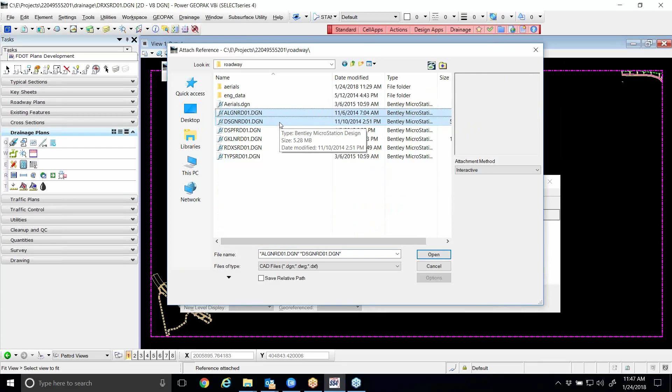So what we were trying to do is reference in some files from Roadway. So I'm going to go up to my Roadway folder. I'm going to use Control, and I'm going to pick the DSGN RD01 and the alignment file. And I'll open those. For your alignment file, you don't want to reference the default model. You want to reference the ALGN RD_50. That has the 50 scale tick marks and station labels in it.

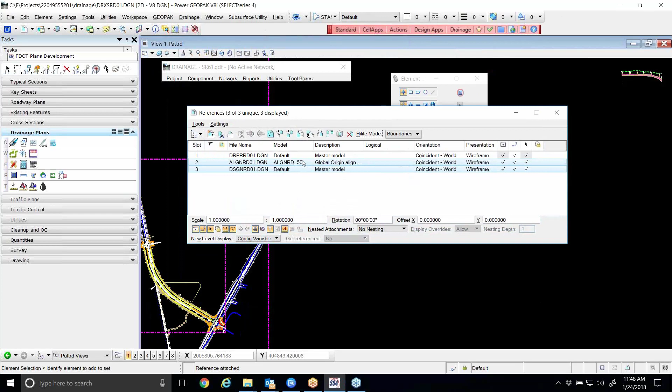Where do you do that? Okay, so when you reference in these files, at the top of the dialog, when you reference in the alignment file, it will default to the default model. You want to pick the ALGN RD50. If you've already referenced it in and you accidentally got the default model referenced, that's okay. You can go to your references dialog, right-click on the ALGN RD01 and go to settings, and you can swap out what model is referenced without having to go through that whole process again.

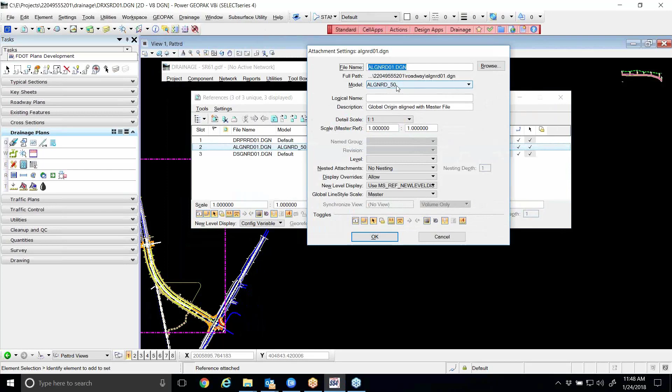But the other two can be default? Yeah, the other two are just default. It's probably the only levels in there. We don't need the survey file. We don't need the GK line file. Really, probably all we need is our DRP-RRD, because we're about to hopefully create some pattern lines that cut through those structures, and we want to put those structures on cross sections. So this is a potential here on step 8, 14.6, where we might run into an issue. We're going to find out.

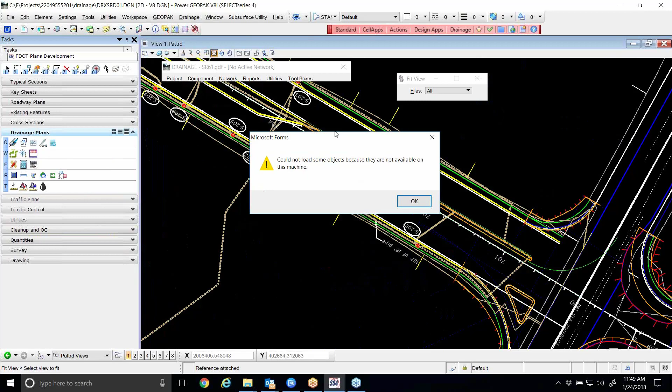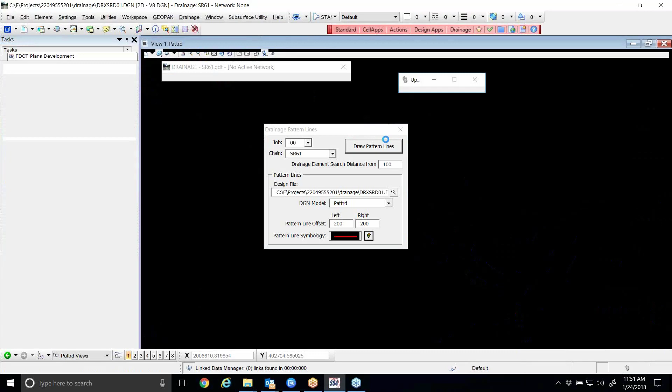Yeah, never mind. Oh, hold on. Go ahead and get rid of that dialog box there. The second scale. All right, I got mine to work. We'll get everyone's working. Let's say you ran into this problem and you had to absolutely get this done. You could draw the pattern lines manually.

Yeah, if I use the old tool, that should do that. It'll allow you to have multiple. Yeah, I don't know if it's drawing them from. It should go in station order. Left to right. Yeah, it lets you pick a chain. We don't care about the profile. Left and right offset, you can pick the symbology. So you could use, if you had to, the older GEOPAK tool for drawing pattern lines. You have to draw it exactly at the station, the center of the structures.

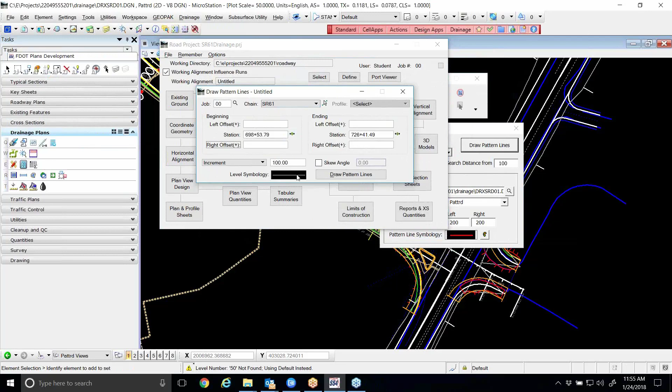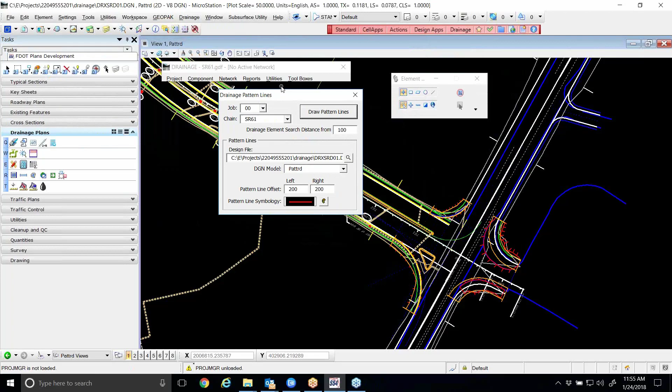You could even draw those lines manually, but as James is saying, they have to be drawn oriented left to right and lower station to higher station. Yeah, they have to be a line, not a line string. There can't be any PIs in it. It's just endpoints. All right, so I'm reopening the DRXSRD01 file. Don't really need to reopen the drainage project for this tool to work.

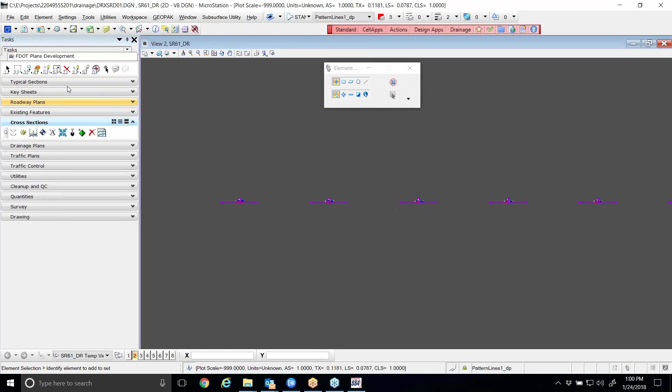And then we'll start here back in our FDOT plans development task, but we're going to be in, not the drainage plans, but the cross sections portion. For your DGN model, you want to be in the PATTRD model. There are a couple of issues that we think we found here on the pattern lines, and your best option here is to delete some of these pattern lines.

So as you go into that PATTRD model, there's going to be a pattern line almost right across from S203. You're going to see a manhole, and you're going to have a pattern line that goes right through that manhole. That manhole doesn't connect to anything else. We think that might be causing some problem with the next few steps that we're going to do. So we really don't even want a cross section there. And as long as the pattern line isn't there, a cross section's not going to get created.

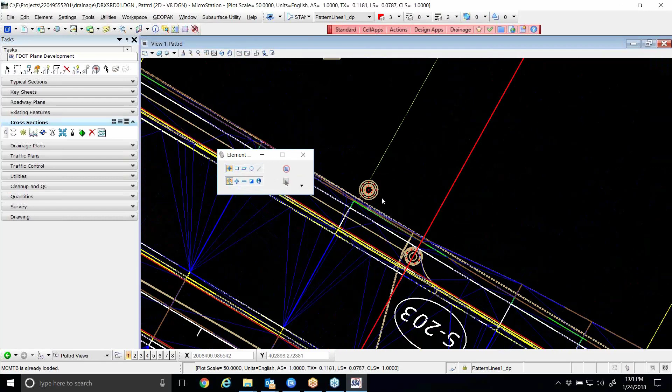So you're going to find one pattern line that goes right through this manhole at roughly station 70419, and you're going to delete that pattern line. So there's a red line that's going to cut right through that manhole. Just delete the red line. And then you're also going to see a DBI. There's going to be a pattern line going through that. That DBI is also not connected to anything else. Delete that pattern line.

And then we're not sure on this next one, but you're going to see a pattern line that goes right through S205. And the only difference, we ended up with it stopping and not processing at that particular station.

And the only thing we noticed that was different is that pattern line didn't have a corresponding structure over on the other side of the road. That may not be the issue, but we don't know because it stopped processing there. But there's another one here at 209 that it may not work on.

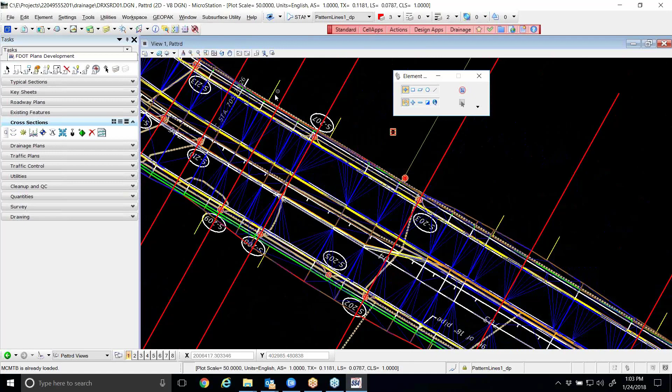So I'm going to leave that one in there, and we'll be able to process and create our cross sections, and we'll make sure that we're at least able to get a couple of cross sections to have the drainage structures on them. We probably will not be able to debug and get them all working. I've been able to get 3 to work so far. And I'll walk you through all those steps when we get there.

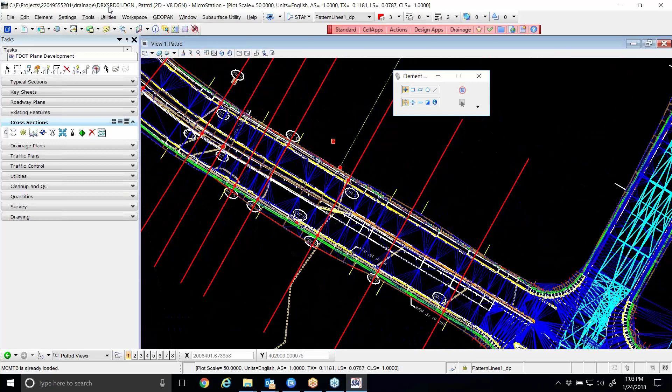So you should have deleted 3 red pattern lines. I'm in the DRXSRD01, but I'm in the model, the PATTRD model. Yeah, delete the one at S205 and delete the 2 that go through these structures that don't have anything connecting them. That may or may not be the issue.

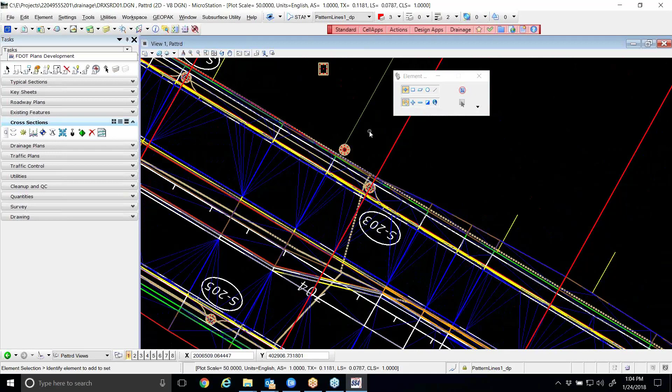We're going to get it to run for a couple of stations and call it good. We're not going to go and fix them all. Mainly what we're trying to teach is the process. We're not all trying to do 10 copies of this project.

But definitely in the real world, if you have a structure that nothing is going to, don't put a pattern line there. And there may be an issue with the criteria file that doesn't like it when there's just one structure that the pattern line is going through. Don't know, not really sure on that.

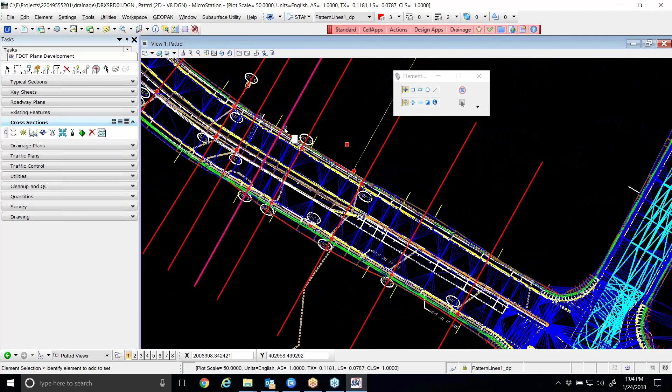So you'll have these pattern lines, and I would still make sure to go up to your utilities menu and pick data cleanup. Let's make sure there's not a pattern line sitting right on top of another pattern line or close enough that it treats it as a single pattern line. So I've deleted 3 pattern lines, just regular MicroStation delete tools.

And now I'm sitting inside of utilities, data cleanup, and I'm going to set my duplicates to be selected. I'm going to hit apply. You just want to make sure that there are no duplicates in this file. I think you'll find a couple, maybe 4.

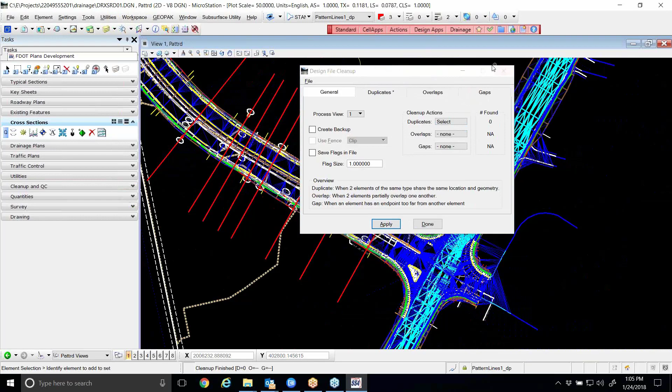So you're under Design File Cleanup. I have my duplicates set to select. I'm hitting Apply. Make sure that number that comes up is 0. If it's not 0, items will be selected automatically. Hit your Delete key. Hit Apply again, and then it should show 0 duplicates. And if you don't find any duplicates, that's great.

All right, so now what you'll do is you'll right-click and hold down your right mouse button, and you're going to pick Select All on Level by Element. And you're going to click on one of the red lines. One red line that you click on will highlight briefly, and then all the other ones will get selected.

So you're going to right-click and hold down your right mouse button, and you'll pick the very top of the pop-up menu. It'll say Select All on Level by Element. And then you'll left-click on any one of the pattern lines. It'll highlight briefly, and then it'll go ahead and grab all the pattern lines.

The reason you're selecting these ahead of doing the steps on 14.7 is we have to have these selected for this tool to work. You can select them right in the middle of using the tool. It's just easier to select these ahead of time.

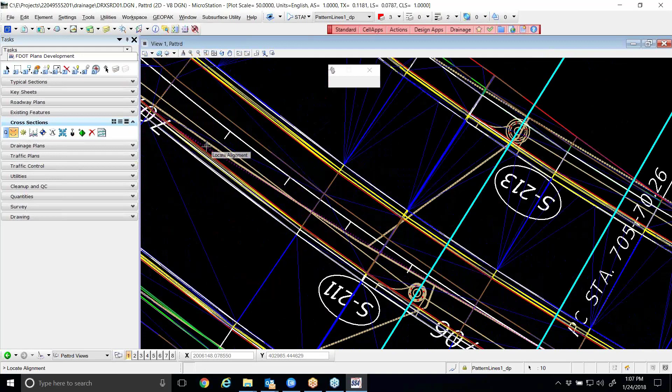So now at the top of 14.7, we're going to go to the cross sections task, and you're going to click the first icon in there that says Create Cross Sections. And if you're like me, you'll sit here and wait for something to happen about half the time, but you have to go out onto your screen, and it's going to say Locate Alignment. And you're going to zoom into your center line alignment, and you're going to left click on that center line.

It's going to bring up part of the dialog box. It is going to sit there for a good 30 seconds or so. The whole screen may even blank out for a moment. Give it literally a minute of time. It will open and it's not going to crash. I know we're expecting that to happen. It sure looks like it's going to happen. It should not. Literally give it about a minute of time.

Once that opens up, and it's really true with this OpenRoads dialog box, any of these dialog boxes that have a lot of different options that someone has built, hopefully for you, and this is where we kind of stopped before lunch. Step 3 on 14.7, we're going to click the Preferences button.

And now, hopefully, if you've gotten this far, you can read your preferences. And these names here correspond exactly to the old cross-section sheet names, if you've ever done that older process. So you'll pick this XS20_10, and you're going to click the Load button.

You're going to get the little swirly there for a moment. It'll go away. Should not shut down on you. And you're going to click Close.

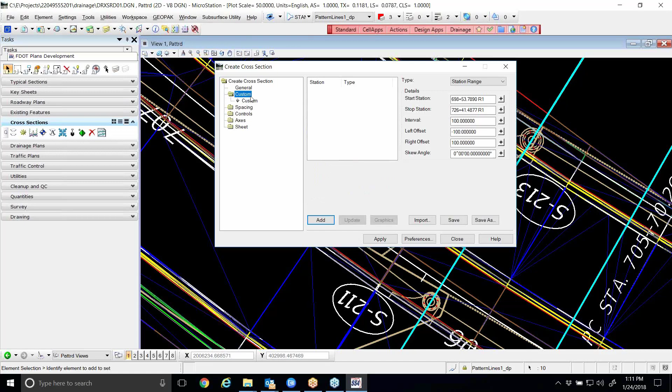So the next thing we need to do is go to Custom, and we don't want to just do it every 100 feet, or every station, the interval. We only want to cut cross sections where those pattern lines are that we drew. That's why we drew the pattern lines. That's why we selected them.

So what you're going to have to do in step 6 here, after we go to the custom folder, you're going to click in the upper right hand side. The station range, you're going to have to change that pull down to say line string. Yeah, they do show that in the book at the top of page 14.9.

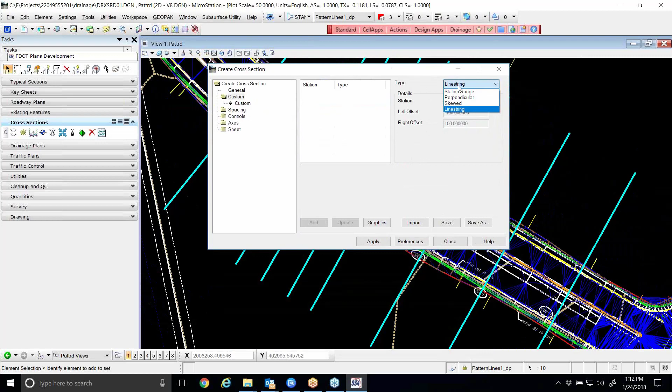What you're trying to get to come up here is the graphics button, and that's why we selected those ahead of time. So you're going to change your type at the upper right to line string, and then you're going to click on this graphics button, and it's going to load up that station list.

And it should not say cannot process any items. We saw that message at lunch, and we found out the reason was there were pattern lines sitting on top of each other. That's why we checked and deleted any duplicates ahead of time. So far, so good. You're going to hit apply.

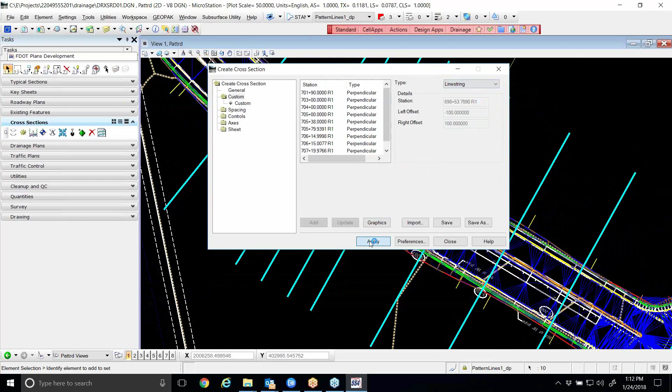You're going to get the little swirly of death in this case, or not. It should go ahead and create that SR61_DR model. So that model is going to have a gray background to it. If you're fine with that, that's fine. I usually change it mainly because I'm usually on a projector of some type, and the grayed out background just doesn't work real well.

If you ever want to change the background color of these cross sections, I can show you from memory, I think. If you go to Workspace Preferences and go to the very last option on the left-hand side, which is, I think, View Options, click on that, and you're going to see there's a drawing model background color. Click on the little square. Change it from gray to whatever background color you want to pick.

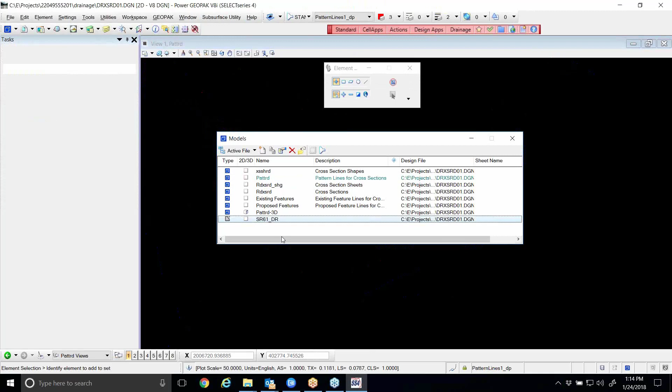Why I can remember that, I don't know. It's a malfunction in my brain of some type.

But it's under Workspace Preferences, View Options. Check on Drawing Model Background Color. Click on the little color box. Change it to whatever you want to change it to. That's not only for this file. It's any other time you open up a model that is a drawing model, and it'll change the background for you.

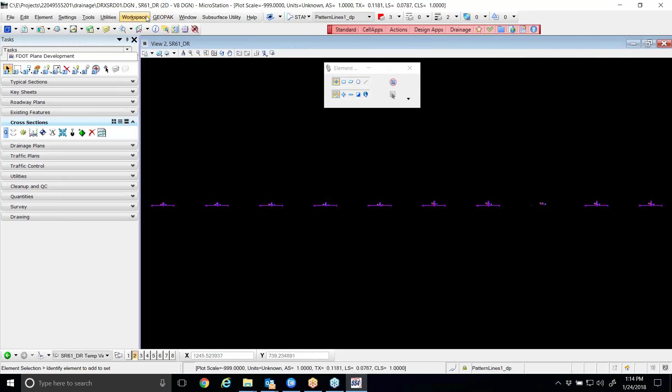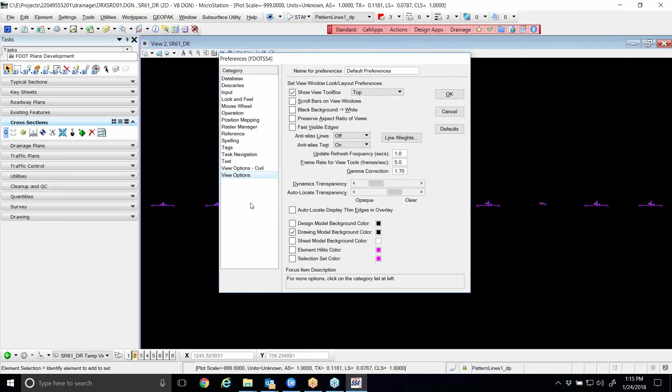While you're there, if you find yourself opening up someone's files and every time you have to reset your highlight color because you use something different, or you have your selection set differently than the files that you open, you can check on these two and it'll override any file that you open. It doesn't change the file itself, it's just overriding that.

Here at the bottom of page 14.9, step 15, go up to your GEOPAK menu, or actually from your cross sections task, click the second icon. It should open up the old cross section navigator.

That means they're the plain old regular GEOPAK cross-section cells, which means you could run earthwork on them. It means you could create cross-section sheets from them. It means that we can run the criteria file for drainage structures that we want to run. You can annotate them. There's an older cross-section annotation tool.

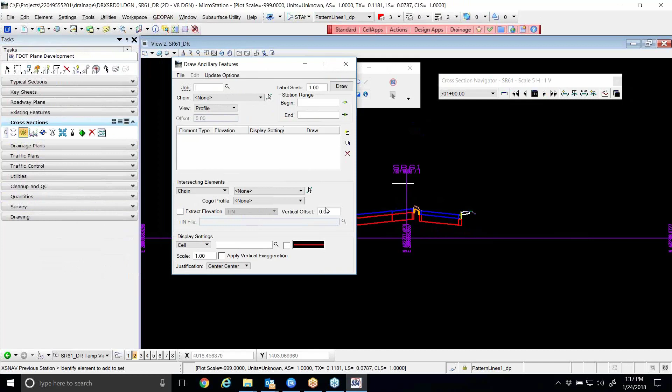You can run the third icon in cross-sections, draw ancillary features, where you draw crossing utilities, etc., that you might have in your project. Once they're GEOPAK cross-section cells, anything you've done with the older cells before, you can do again.

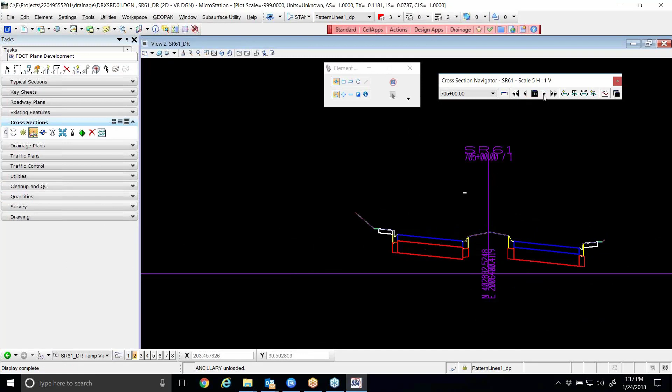You will see that there is a little bit of an error in their models. There's a tool that searches for traffic separator and what's happening in the median. You shouldn't really have those little white tick marks above the cross section. Shouldn't hurt anything, just a little side note there.

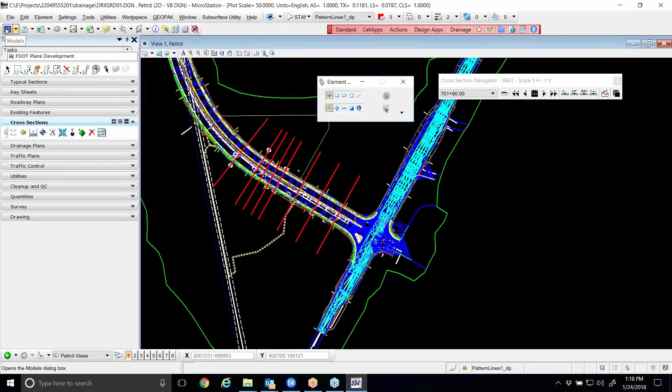Also in the model, unless the level is off, I don't see any existing ground line. You should have an existing ground line. If you did not get the existing ground line, go back to your PATTRD model, and under references, you will want to attach your GDTM-RD02 from the survey folder.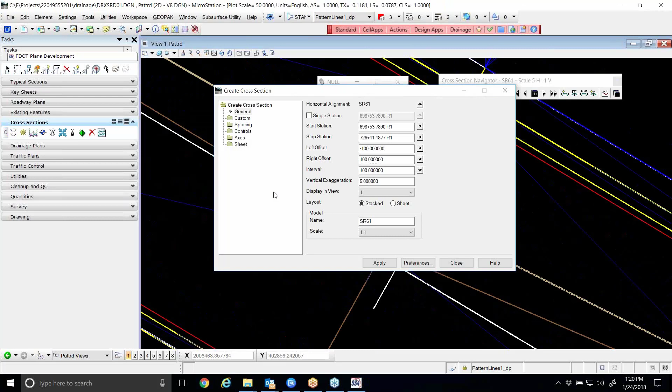That's why I was not getting it as well. Yeah, you're attaching the GDTM-RD02, and the reason you're attaching the 02 and not the 01 is this tool is looking for an OpenRoads terrain model. That is in the 02 file. The 01 file, I think, has just the graphic triangles in it.

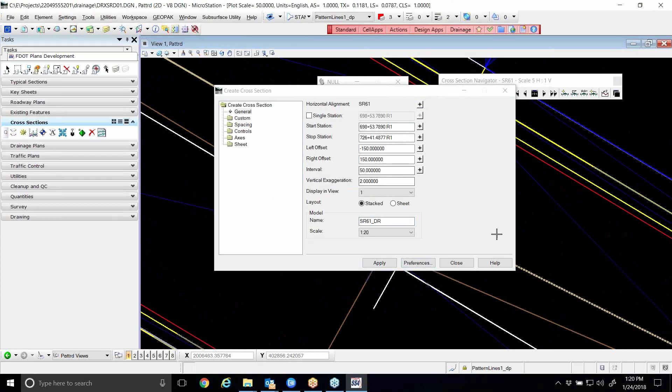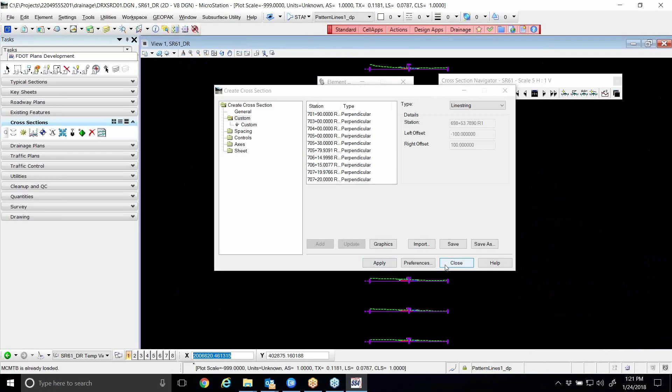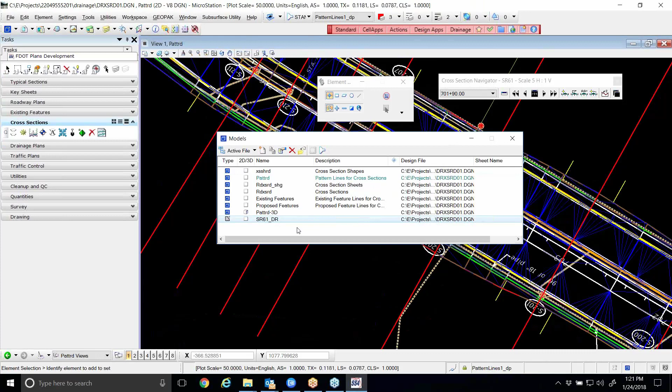As long as you attach that GDTM-RD02, you should end up with the existing ground line. Now you will have to rerun the cross-section tool. So what I would do is go back to your PATTRD model and then delete the SR61_DR. And I'll get all the settings up on screen. I'll do the same thing. You'll end up rerunning the cross-section tool.

So you'll click on the cross-sections, you'll click your alignment. You'll have to literally wait about a minute or so for that create cross-section dialog to load up. You'll need to reload the 20_10 cross-section preferences. And you'll need to reselect those pattern lines and pick them on that custom leaf here.

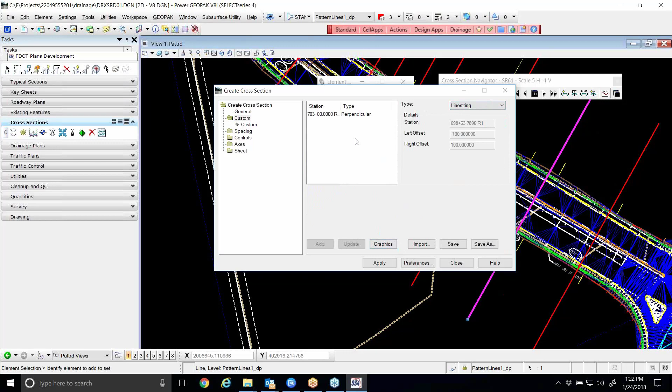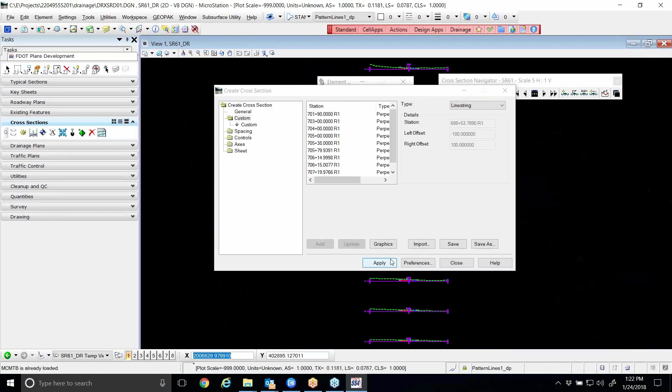So you'll pick custom, we'll set it to line string, click on graphics, oh, it looks like it only grabbed one of them. There we go. And then you'll hit apply again. Should open up that model with the cross sections having the existing ground line now. All right, and this time mine are stacked vertically.

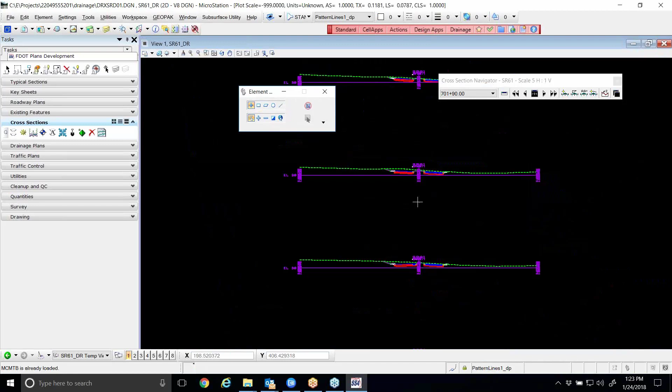That's fine. All right, so what we need to do now is over here on page 14-10. Really, everything we've been doing in chapter 14 has been leading up to this point here. We had to place the pattern lines so we could cut the cross sections exactly where those structures are. We had to clean up some pattern lines that really didn't need to be there. We created these cross sections.

Whole reason is that we need to go ahead and draw the drainage structures on top of these cross sections. You may be able to get these, and they may already be in the roadway folder. You can make a copy of that file. What we're doing is we are drawing on top of these existing cross sections.

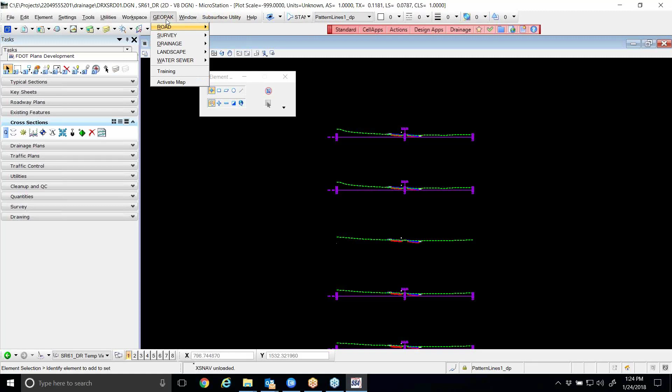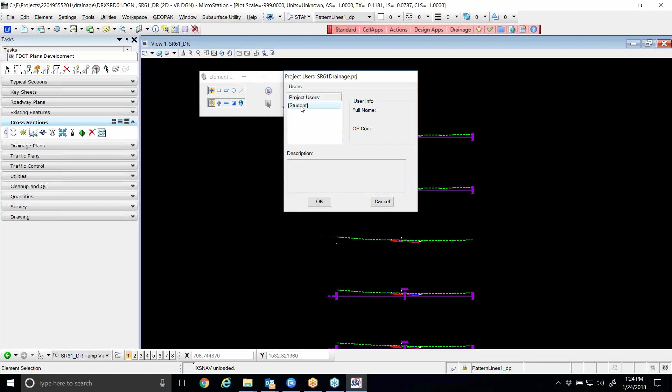So to do that, we're going to open up our project manager. So you're going to go to your main GEOPAK menu, and you're going to go to Road Project Manager. It should pick up your SR61 Drainage PRJ. You may get unable to access feature database. That's okay. And then you'll be able to pick student, click OK.

And what we're trying to get to is this big proposed cross sections button that's here on the right-hand side of that road project dialog. Once you click on that proposed cross-sections dialog, you should see that there's a list of runs that come up. You want to pick that drain_XS run.

You're going to see that there's a lot of sections on this dialog that's about to come up, and they have filled out almost all of that for us, and they saved it as a run. Does everyone have the drain XS run? You're going to click that, click OK, and you're going to see the proposed cross-sections dialog. We're going to go through everything on the left-hand side and make sure that everything is good to go.

So your first section on the left-hand side is going to say XS DGN file, and you want to make sure that if you hover over where the XS DGN file path is, it says CE Projects 220 drainage, and it's pointing to your DRXSRD01 file. Should be fine. Tolerance should be pointing to 0.01.

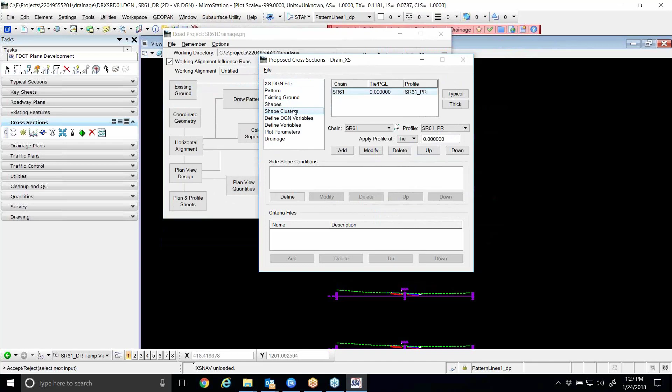Define DGN variables, nothing to do. Define variables, nothing to do. Plot parameters, probably nothing to do. Everything on plot parameters should be unchecked just like it is at the bottom of 1411.

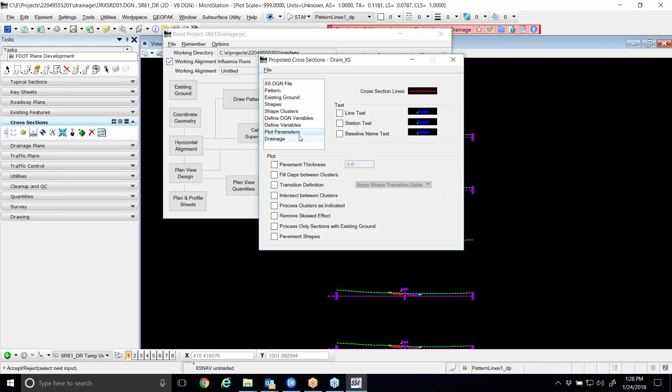And then at the top of 1412, we're going to click on Drainage. We want to make sure that we check on Draw Drainage Components. Your project database should be your SR61 GDF file. And you're probably going to have to change the drainage DGN file. That run, I believe you'll find out if you hover over the drainage DGN file, it might not point to the right location. But just check it.

It should point to the DRPRRD01.DGN. So far, so good?

Should be good then. So what we're going to do now is we're going to pick File, Save Settings. That will save the settings in that run, so if we need to redo it, we don't have to go back and check any of the settings anymore.

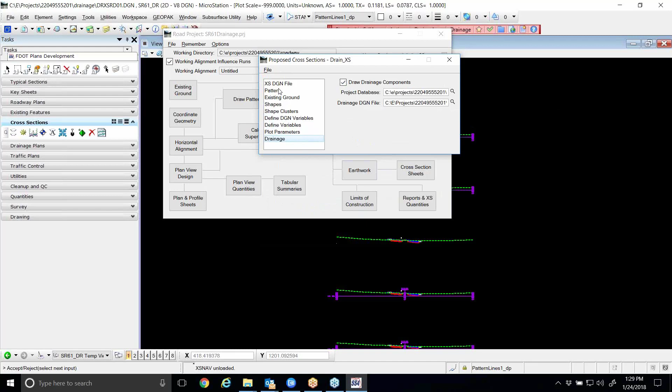And then we want to process this. We're going to pick File, Run. I would not log it to screen, I would log it to a log file. It'll still log it to screen right in front of you as well. And I would call that log file - I called mine DrainXS.log.

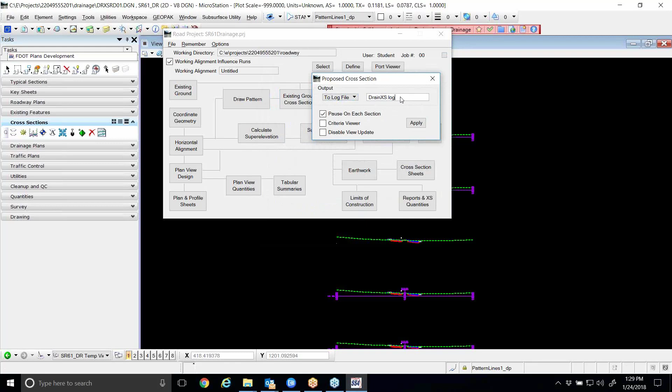And there is a trick we're going to try here, so you at least get 2 or 3 cross sections and get it to work somewhat. You're going to check on this pause on each section. I went through this during the lunchtime, and I know how many times to click one particular button before it's going to mess up, if it does mess up. So make sure you check on pause on each section.

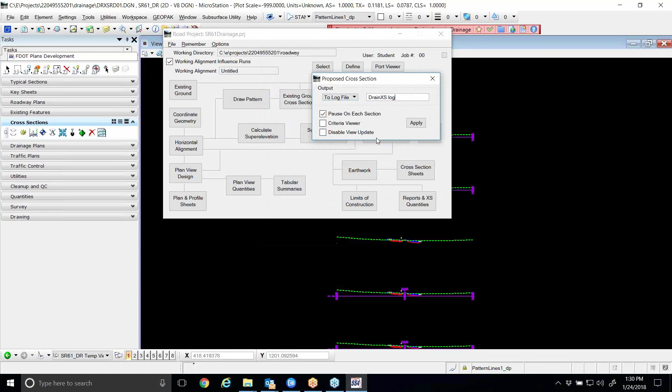Don't check on criteria viewer. Don't check on disable view update. And then you're going to hit apply.

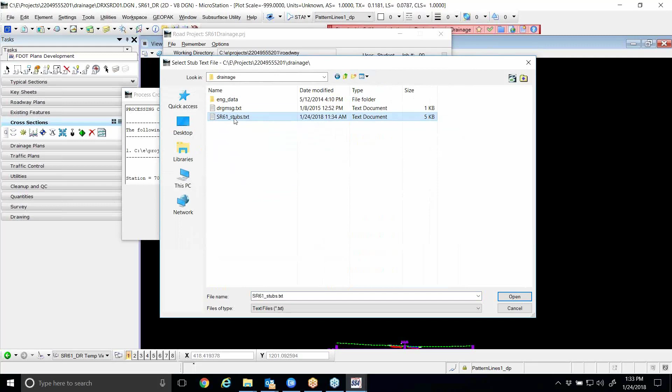And this is way back to the beginning of chapter 14. This is where it wants that stub file. So let that run. Once it asks you for the stub text file, you'll click File, and you'll need to go out to your drainage folder, and you'll pick the SR61 stubs text file.

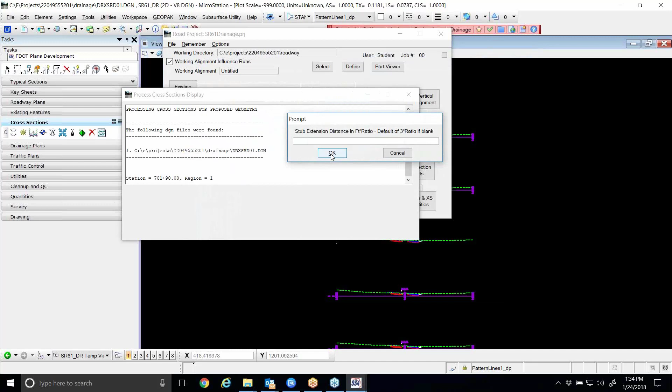You'll click OK. On the right side, we're going to just have the structure number only. You'll click OK to that. The structure label offset from the center line is going to be 6.5, it's in feet. You'll click OK to that. And then the stub extension, that's the little piece of the pipe that comes out of the cross section if it's kind of pointing your direction.

That's going to be 4.5. You're going to click OK on that, and it's going to jump to one section, and you'll hit continue once, twice, hit continue 3 times, and then hit abort run.

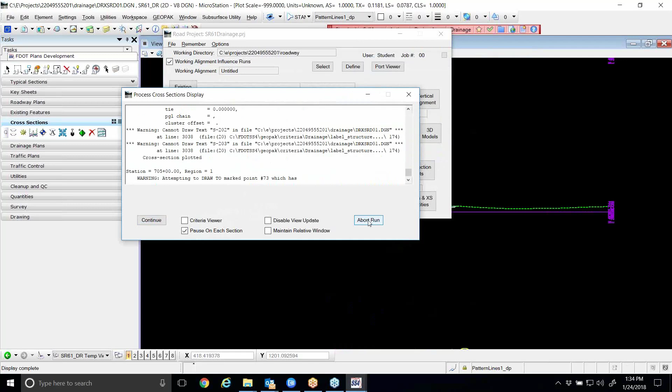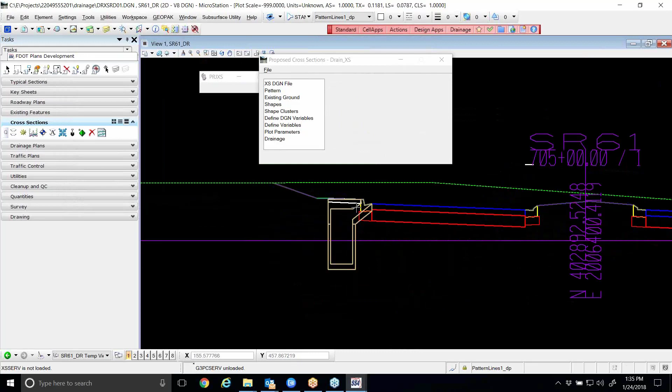Just trust me on this. Yeah, if you hit it too many times, I did this a bunch. But now this was before cleaning up the extra pattern lines, before cleaning up the duplicates. I might run it again in a minute, but for right now I'm clicking continue 3 times, and I'm hitting abort run. And the reason I did that is if I hit run continue one more time, it's going to crash and it's going to lose these drainage structures that it did draw.

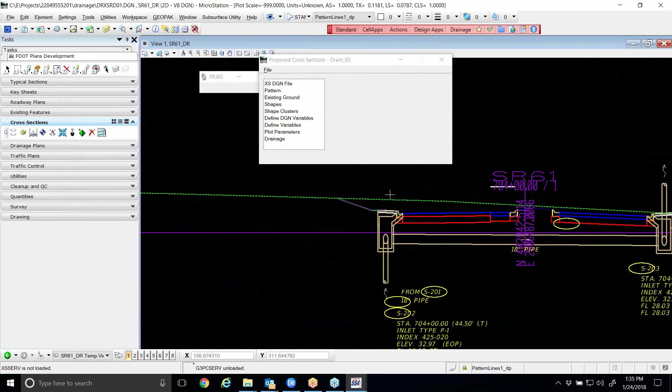So it did 3 sections and it's not perfect, but it did a pretty good job. Now sometimes these balloons will mess up. It did a pretty good job at putting those onto the 3 cross sections. So I wanted everyone to at least get structures on 3 cross sections so that we could see that.

And we'll skip the putting these cross sections here on sheets over here on page 1413 and 1414, because that is the same exact method that's been out there for at least 15 years.

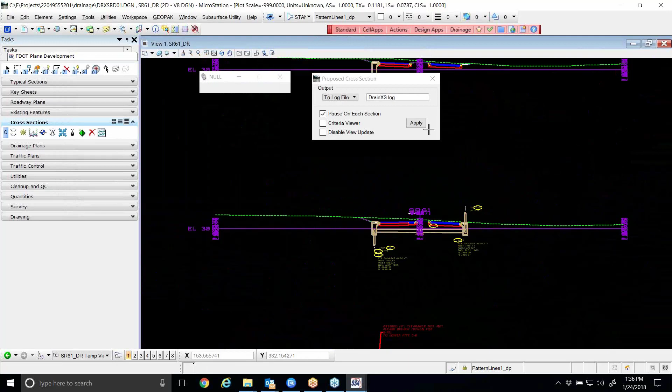Now, I'm going to push my luck a little further because that's what I do. I'm just going to uncheck pause on each section and hit apply. It'll remember the stubs file.

It locked up a little further down the road, literally this time. Locked up at 705+38. So this was most of my lunchtime. Find the next station it messed up on, see what's wrong with the pattern line.

You could take this GEOPAK drainage database - I'm pretty sure there's an import from in the SUDA tools, there's an import GEOPAK drainage database. That'll throw it into the 3D model view. And then if you run the regular cross-section tool that we ran a minute ago, whatever's in that 3D view, it's going to show up on these cross-sections. That could be your workaround. There you go, see?